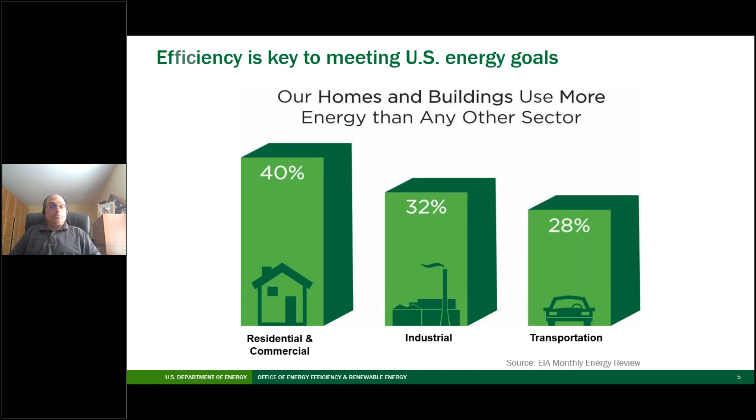Okay, we can go to the next slide, I don't want to take too much time. So in our office, basically we do the entire cycle of policies from R&D to integration, and trying to help other people do deployment, what we would call market transformation programs, supporting voluntary measures. We also have the regulatory authority for mandatory building efficiency standards, which is one of the most impactful things we can do. However, they're helped when they're supported by the voluntary measures. The building codes, we do a lot of analysis, but those are handled independently. We only have the authority on government buildings. In any case, this whole process is extremely impactful for what we can do for the country.

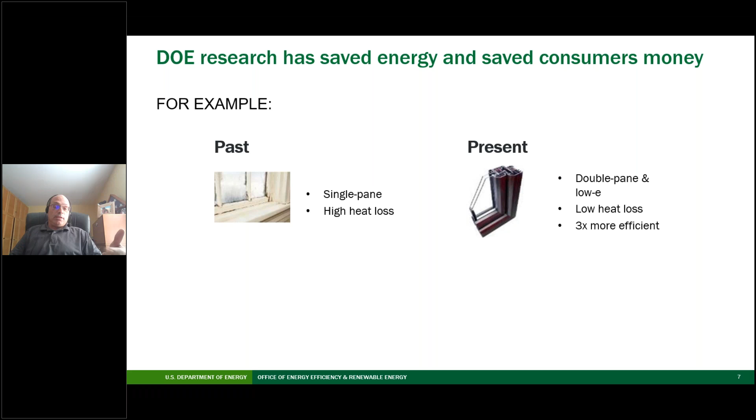Okay, next slide. So this is an example of windows, because I'm the Windows R&D manager. You can just hit the next animation. So basically we went from single pane windows to double pane low-E, a significant improvement, 3 times more efficient. We also increased the embodied energy from 1 piece of glass to 2 pieces of glass. Glass is very energy intensive, but it's still about an 8-to-1 ratio between the energy it takes to make the window versus the operating consumption.

So in the future, when we do R&D, we're actually going to go the other direction. In the R6 window, with a thin triple, we'll only have a thin piece of glass, and a vacuum glazing that can get to R10 will only have 2 panes of glass. So we won't be increasing the embodied energy by much at all, but significantly increasing the performance. Now, if somebody goes from an R50 attic to an R60 attic, the additional benefits for energy efficiency are relatively small for the ratio of material. So we have to balance that as we look at the whole cycle.

Layla is going to talk more about some of the other activities we have. So anyway, the appliance standards alone have had a huge impact for every household. I think recently President Obama just did an interview where he mentioned one of the most impactful things that weren't noticed when he was in office was the appliance standards program. So we just got some publicity for that. Okay, Layla, take it away.

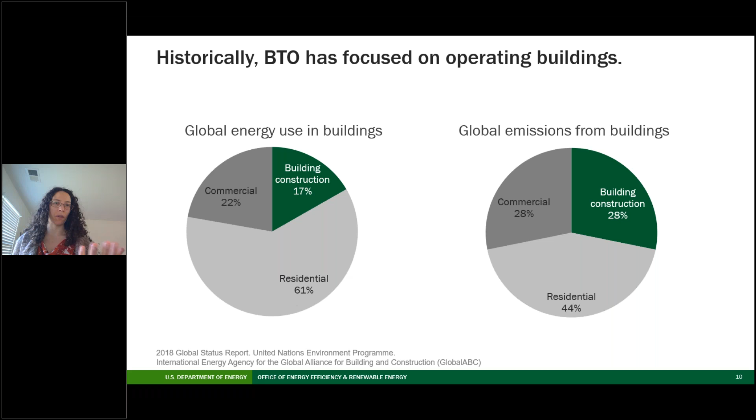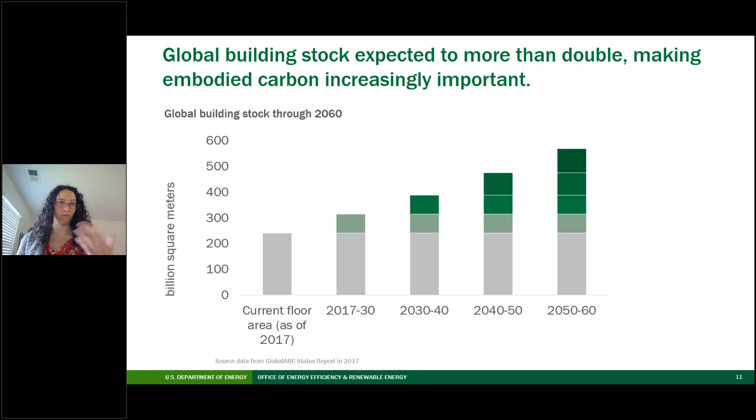It's really important that we address this because global building stock is expected to more than double by 2060. And if we want to be able to address the emissions associated with those new buildings coming up, we need to act now.

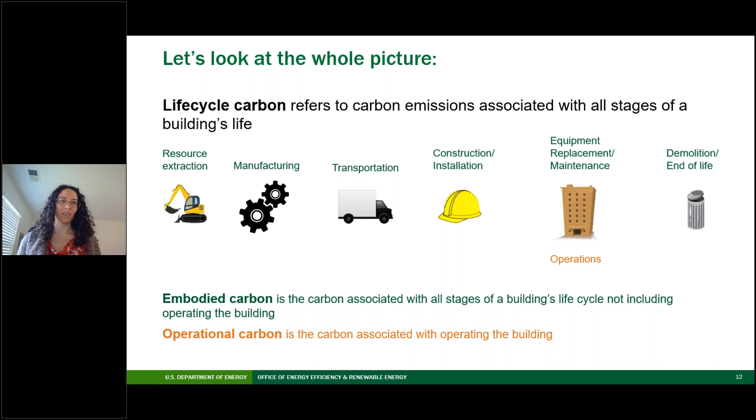If we look at the whole picture, that's the life cycle carbon, which refers to the carbon emissions associated with all stages of a building's life. It includes both operational carbon, which is where our office has historically focused, the emissions associated with operating buildings. And it also includes embodied carbon, which refers to the emissions associated with all these other stages of a building's life, from extracting raw materials to construction through to the end of life and demolition or recycling and reuse.

So where are the biggest opportunities in this space, and where is our office needed? Where should we focus, and what can we do right now? One of my takeaways from our first webinar with Kate Simonen, Ed Mazria, and Michael Giroux was that there's a lot to be done. There's R&D, we need good data so we can value things appropriately in our decision making, and there are changes that can be made right now. In that spirit, we have this webinar. On that note, I'm going to hand it over to Victoria.

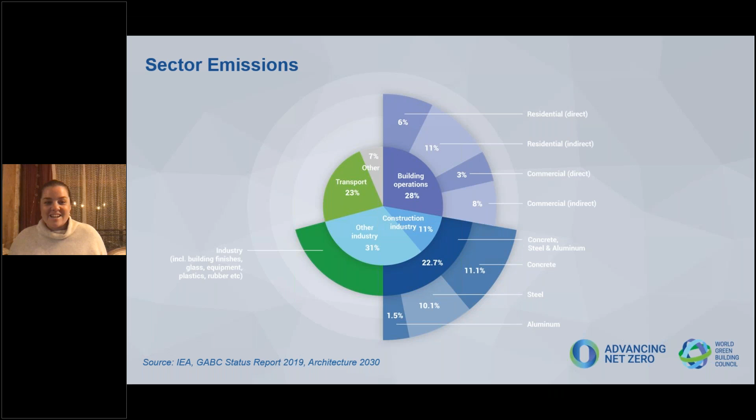So by 2050, we want to see all new buildings, infrastructure and renovations have net zero embodied carbon, and all buildings, including existing buildings, be net zero operational carbon.

So a huge challenge there to both address the performance of existing buildings and to ensure that we can build our buildings with net zero embodied carbon. From 2030, we think new buildings, infrastructure and renovations should have at least 40% less embodied carbon with significant upfront carbon reduction, and that all new buildings must be net zero operational carbon, again in recognition of how many new buildings we expect to be built between now and the mid-century.

Our framework sets out some umbrella definitions for achieving net zero operational and embodied carbon that the Green Building Councils then determine the most appropriate application for their particular market. In the US, it's manifested as LEED Zero.

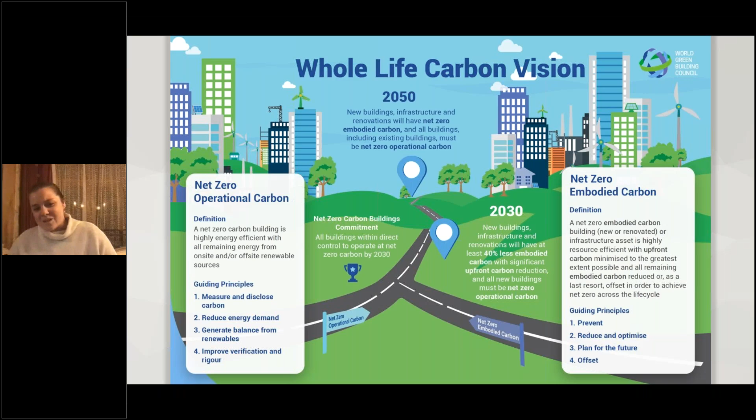What sorts of actions can investors make in terms of providing finance linked to lower carbon and alternative solutions, how designers can carry out all the various modeling and technologies, but that requires data from manufacturers on all the different products and their carbon footprints. So all of these different actions enable others to achieve their net zero goals.

There's a shared burden here. We cannot achieve this vision relying on one part of the sector, one slice of the sector, and so we must all take actions in that same direction.

And we're starting to see some really promising signals from around the world, from concrete manufacturers and steel manufacturers, from designers and developers setting some really high and ambitious targets, followed by investors requiring life cycle analysis on projects and policymakers in their planning legislation as well. So we're really optimistic for the future and making sure that we can achieve this vision and help address the embodied carbon of our sector.

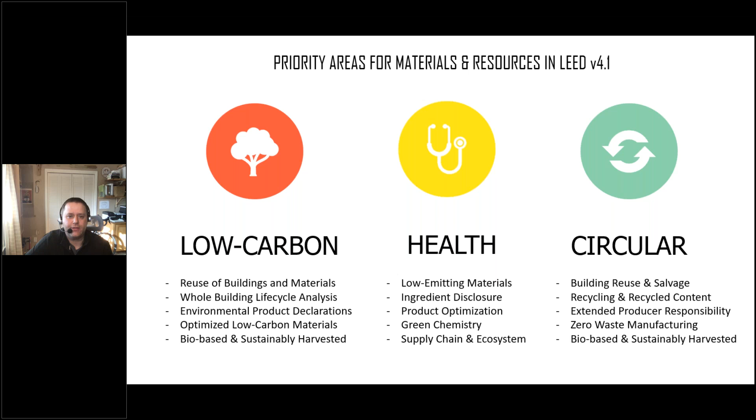Now, when looking at how to address specifically embodied carbon in LEED on projects, and we're seeing this in billions of square feet of projects now that are doing LEED v4 and 4.1, they're selecting credits in the rating system that do address embodied carbon. And we kind of look at it at three different nodes of interaction or intervention.

There's the design team, the things the design team can do to design and reuse and look at ways to reduce the overall carbon footprint of that project.

And once the design phase moves on to the next, they can look to product manufacturers. If you're in the manufacturing space or the R&D space for companies and manufacturers, there's a lot they can do to reduce the carbon footprint of that supply chain. And we know that's where a lot of these hidden emissions are in that supply chain. So things like EPDs, and again, shifting to renewable products and materials, circular, recycled - that's where you find a lot of traditional green strategies as well.

And then finally, at the construction side, there's a lot of opportunity for the construction teams and the specifiers that are procuring materials to do things like recycle waste first and foremost and design out waste, but then also procure low carbon materials. There's things like the EC3 tool, embodied carbon calculator, that's out there to help with selecting materials and products that have lower carbon footprints and result in a reduction of total waste.

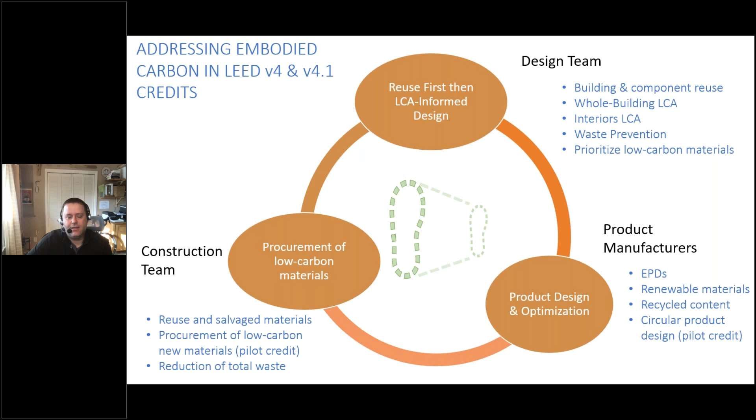And I think that's my last slide. Next one is just some wrap up and thank yous and more information. So I'll stop there. Thanks. I think I turn it over to Victor now.

Greetings. Thanks, Wes. My name is Victor Olgyay, and I'm a principal with Rocky Mountain Institute. I'm here to talk to you today about some work that I've done with the GSA Green Building Advisory Committee.

The Green Building Advisory Committee, or GBAC, provides independent policy advice and recommendations to the GSA's Office of Federal High Performance Buildings. And this is originally set up through EISA, the Energy Independence and Security Act of 2007. And the purpose of EISA is to advance federal building innovations in planning, design, and operations to reduce costs, help with agency missions, enhance human health, and minimize environmental impacts.

So what we did was we set up a little task group within the GBAC, and we wanted to see if it would be worthwhile to think about low embodied energy and carbon materials. And if it would be worthwhile, then we should produce recommendations. And so I'll be talking to you today about these draft policy recommendations.

And to be clear, these are draft recommendations which have not been adopted yet, but they are scheduled to be presented to the Green Building Advisory Committee in January of next year. Next slide, please.

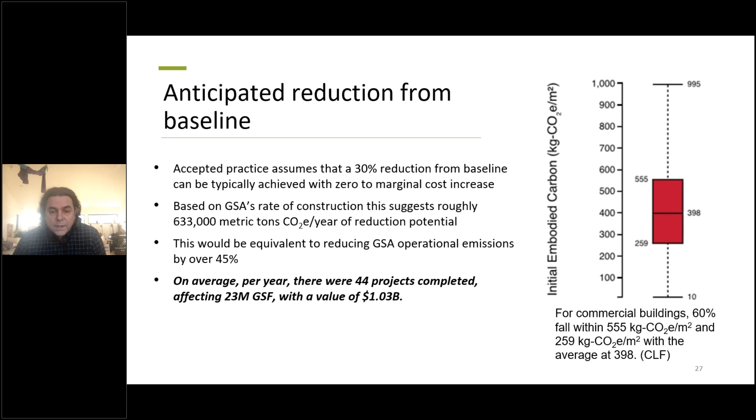So because of this, we decided to go ahead and produce these low embodied carbon procurement guidelines. Next slide, please.

So we had these discussions and ended up coming up with two key policy recommendations. Because the GSA has both leased buildings as well as owned buildings, we produced one set of guidelines for smaller projects, which are often tenant improvement projects, and another set of guidelines for larger whole building new construction projects. We worked to align these guidelines with existing federal protocols, including the prospectus procurement level, so how they actually procure these services. This year it's about $3 million, a little bit more than that. So projects less than $3 million would take this materials approach, and prospectus level projects would go for the whole building life cycle approach. These are the larger projects.

So the materials approach is centered around providing basically EPDs, environmental product declarations, for the top 75% of materials in the project. This can be by weight or by cost. And the EPDs provided have to be in the top 80th percentile of the best producing products. So this means basically we're getting rid of the worst products.

The larger prospectus level projects need to meet this materials approach, and also need to do a whole building life cycle assessment. So when a project team does a whole building life cycle assessment, they can actually make a lot better decisions than when they're just doing it material by material.

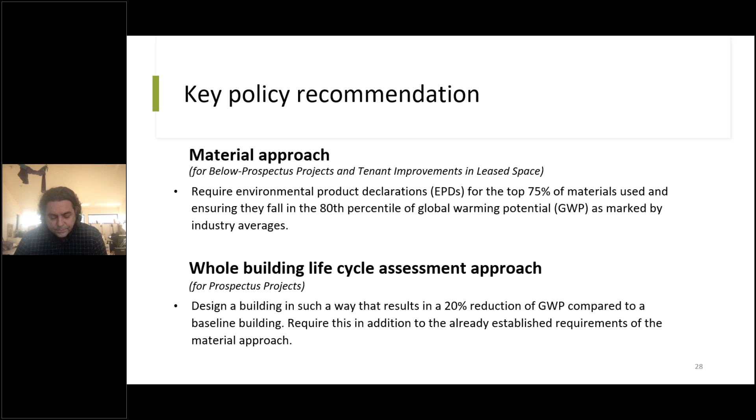So these recommendations have yet to be submitted to the GSA. That'll probably happen this January.

But there's a whole lot of benefits we see this can have. Reduced embodied carbon costs can be correlated with energy costs, and we see this in the range of $10 to $15 million a year, let's say 13 million. That's not directly benefiting the GSA, but since it's in the supply chain, it benefits taxpayers as a whole. Air pollution is probably the most common quantified element and can be considered approximately $12 million a year in savings, and there's a lot of health costs associated with that as well.

There can also be reduced costs from more material efficient designs. This hasn't been well quantified, but we suspect it can actually be very significant. The ease of regulatory compliance is really interesting because as more and more of these regulations come into being around carbon and embodied carbon in buildings, the GSA will be in a much better position to meet these emerging requirements.

And then finally, there's the climate change related cost, and this is really the biggest thing. Sometimes we think of these as externalities, but many of us have been experiencing 2020 with the extreme number of wildfires and other climate related disasters, hurricanes, and so forth. Reducing the amount of carbon we use to build our buildings will actively work towards mitigating this climate change. So that's what we've been doing, and thank you for your attention. I'll turn it over to Travis.

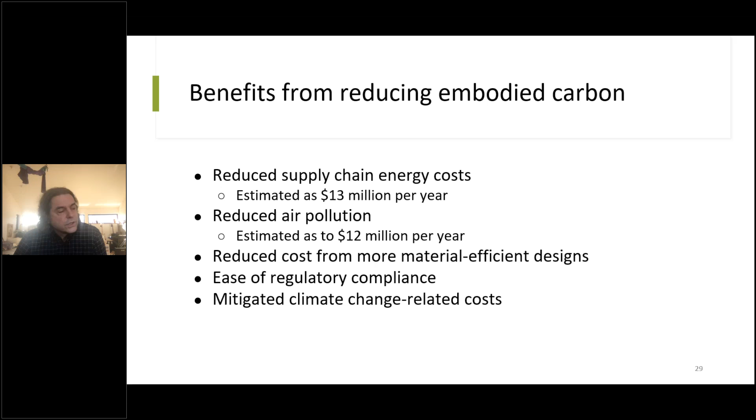Thanks, my name is Travis English. I work for Kaiser, and in this context we are a building owner and developer. I'm the director of engineering for our design and construction program. I watched the other sessions in this seminar series, and I'm a little out of place. You're going to see that, but I may actually be the only panelist yet that represents someone who's spending capital on buildings, paying energy bills, and actively managing an energy and carbon portfolio. So I have a scary story I'd like to tell you in the next five minutes that I think it's a good time to listen to, and maybe heed it.

Okay, next slide please. So some quick history. Our organization started requiring models for all of our new construction projects in 2012. Those are energy models, not carbon. We standardized our life cycle cost assumptions and modeling assumptions and all of that.

Next slide, these will go fast by the way. Then in 2017, we had built a bunch of buildings, 19 to be exact, and we opened them and ran them for at least a year. Then we came back and looked at the design model versus the building performance. The error between the model and the bills was between minus 19% and plus 160%. The average error was 50%.

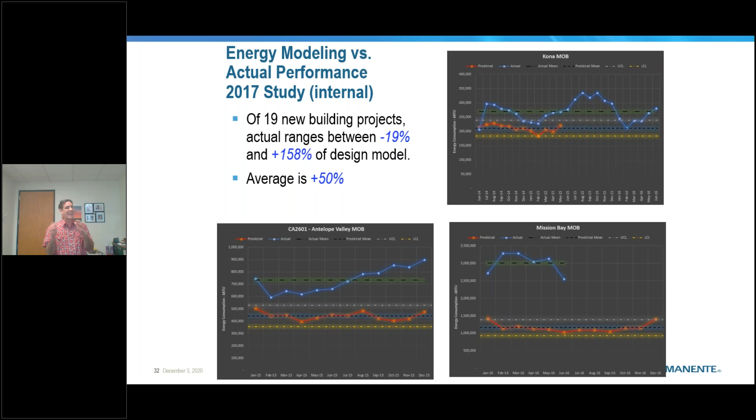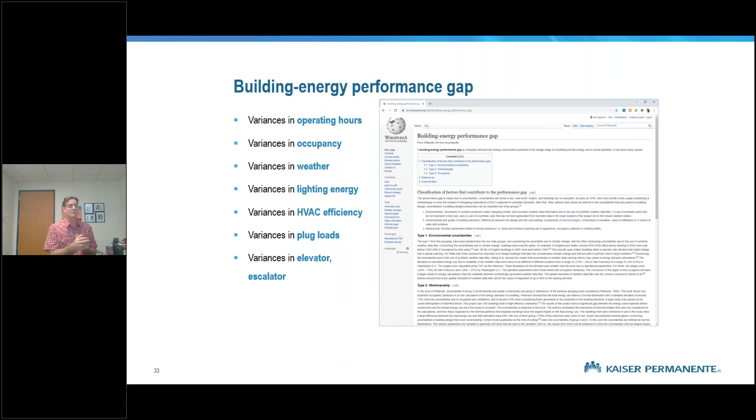Next slide. There's a whole bunch of reasons why those models vary from reality, but the point is that they do. At this point there's even a name for this — you know it's real when it has a Wikipedia page, right? It's called the Building Energy Performance Gap, and it's pretty big. My study was 50%. I have a friend in the Netherlands who did a study and found 60%. You see some real optimistic stuff produced by consultants that talk about 10 or 15%, but realistically for new construction right now we're sitting at about 30%.

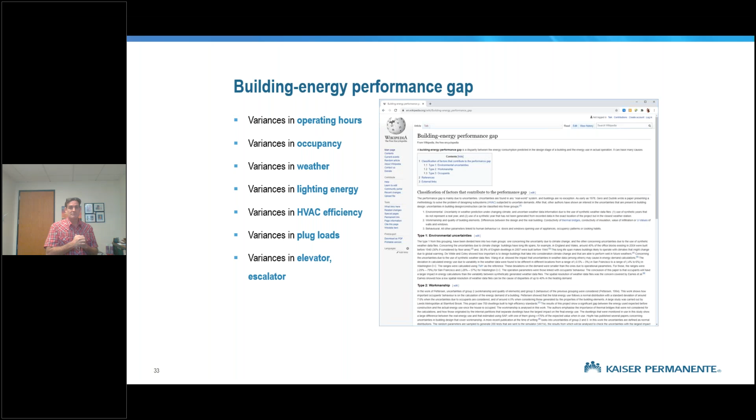Next slide. So we came back to our standards around 2016 and did two things. First, we told our project teams: you shall assume at least a 10% margin of error on existing buildings and 15% margin of error on new construction. That was unpopular. The second thing we did was add to our contracts that our design professionals must predict energy consumption, and this is important — they didn't want to do that. Our design professionals wanted contract language saying these models are theoretical, for comparative purposes only. So we had to put a hard stop to that and say no, your model must be a prediction of the facility performance, and yes, we are going to check it.

Go ahead and go forward.

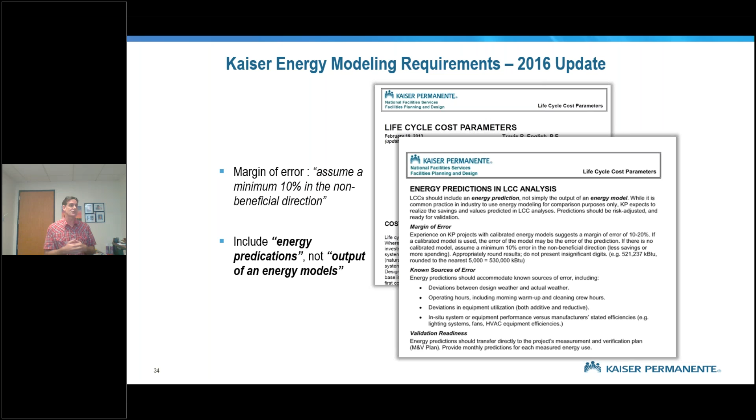So this is one of those calibrations. I don't want to spend a bunch of time on this. I'll point out this one was 63% difference, and there's natural gas at a 200% variance.

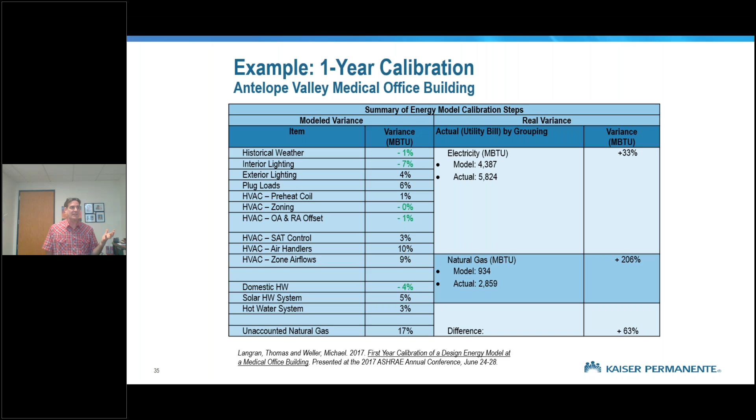This next slide is just to say that we're continuing to do these reports here in 2020. My hope and my goal has been that over 5 years we could shrink the gap, but I've got to tell you that's not going well. We've had some projects that come in really close to their model, but most of the errors we see, even a few years into trying really hard, are still pretty big errors.

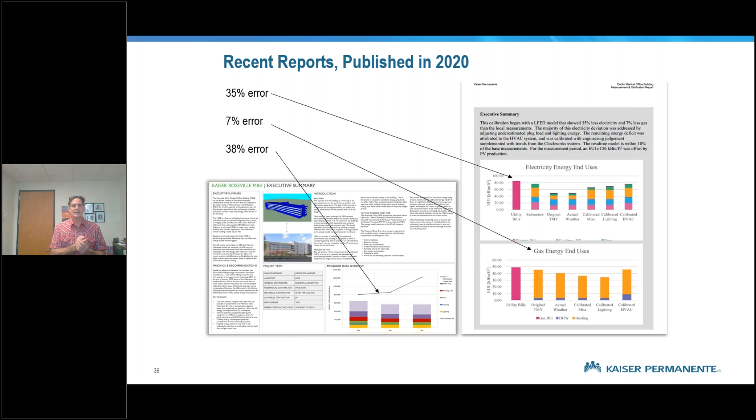A project team came in. They had this young, brilliant PhD modeling guru with a folder full of life cycle models, and he presented all of his models for 40 minutes. It was very clear he had worked on them for 6 months. And at the end of the meeting, I, the big bad mean owner, took my calculator, and the difference between the biggest energy number he showed and the smallest energy number he showed was 9%.

So I told the whole team, thank you for all this work. None of these options beat the credibility of the model, so we, the owner, want the lowest first cost option in all cases. In other words, I'm not going to invest in any of your ideas because your modeling isn't credible enough to earn the investment.

You can actually kill the slides at this point, but I'm going to continue to talk for another minute. You'll notice that I didn't talk about embodied carbon yet, right? Just so you know, Kaiser Permanente is carbon neutral. We do manage our carbon portfolio - scope 1, scope 2 carbon neutrality.

We announced that this year. We don't do embodied carbon yet - that word is 'yet.' I can't really say anything more about that. The title of this seminar, though, is Real World. And so I want to tell you this sort of Nostradamus story, because I think in the rearview mirror, we...

We made a big mistake with building energy efficiency. It was unintentional, to be sure, but we created a zero accountability industry - ASHRAE 90.1, California Title 24, LEED for that matter. For the last 20 years, we've had architects and engineers going out there doing these models day in and day out. Owners pay for them. Government agencies are stamping them with smiley faces. And we have kind of created this industry culture where the people producing the models don't care.